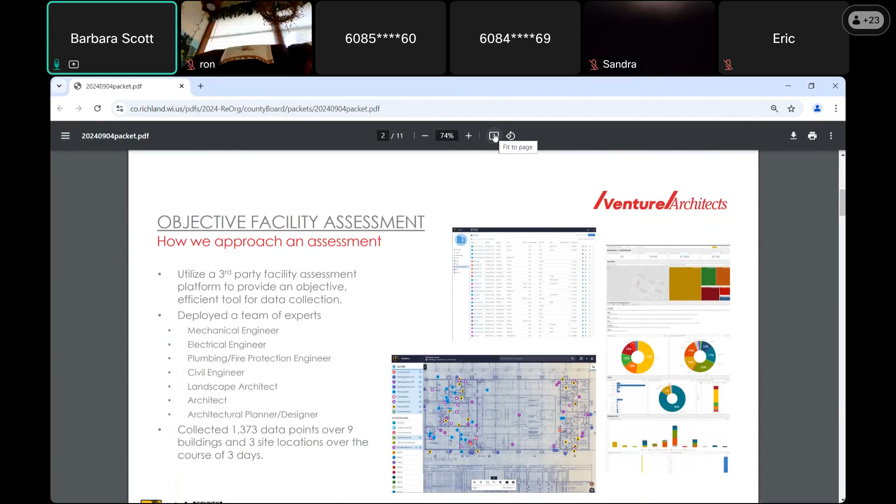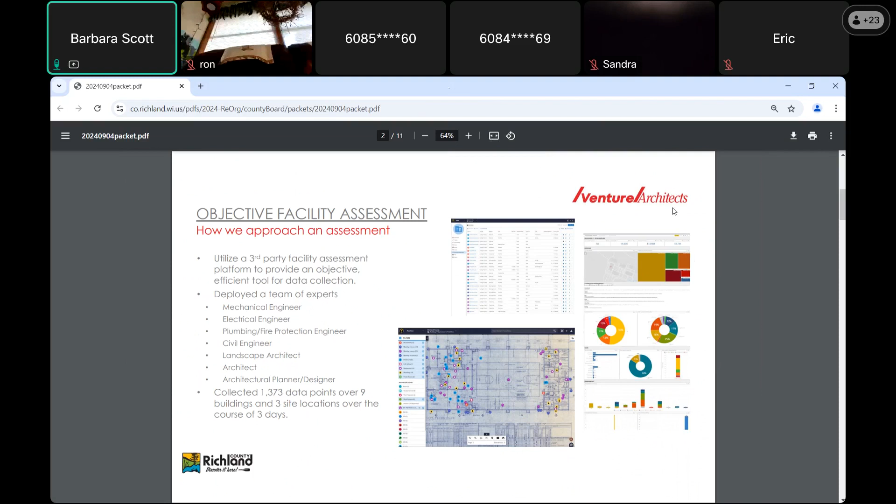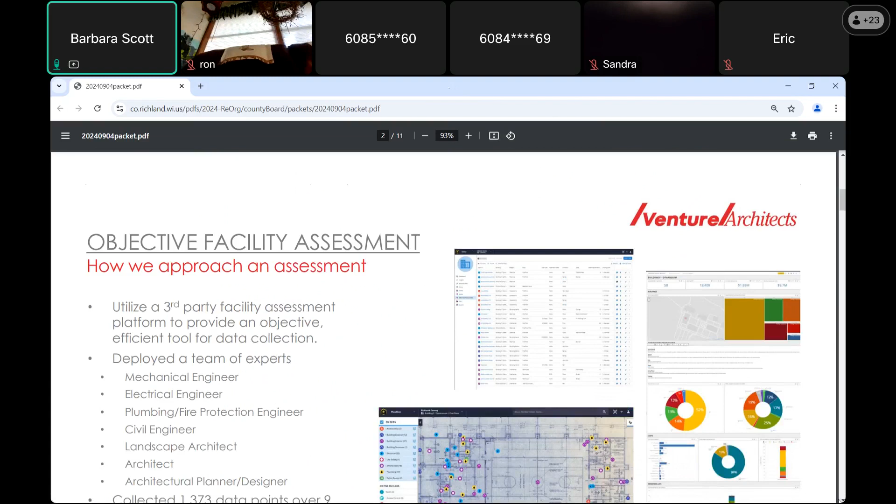One of the key things that is extremely beneficial for us is we used a third-party software platform as part of our process for collecting data. Facility assessments can be very subjective or objective reports. By using this third-party software platform, we were able to help validate for the county that what we are assessing here is as objective as possible.

As part of that process, we collected over 1,300 data points over 9 buildings and 3 different site locations. The 3 site locations would be the UW Richland County campus, the courthouse and the block where the courthouse and jail are, and across the street where health and human services is located. We looked at all 9 buildings that are part of that. We did not look at the Simon Center, that was not included as part of this. All of that was taken care of over the course of 3 days in April.

So that is the background. As you can see, we have imagery here of the platform we were using and how everything is collected. We have the floor plans on, and we're all using tablets as we go through. We can take photographs as we're going through, and we're logging the data. We can even get into the specifics of an air handling unit, and if there's a placard on that unit, we can take a picture and it'll actually read all of that data. So it's a very data-rich environment that we're working in.

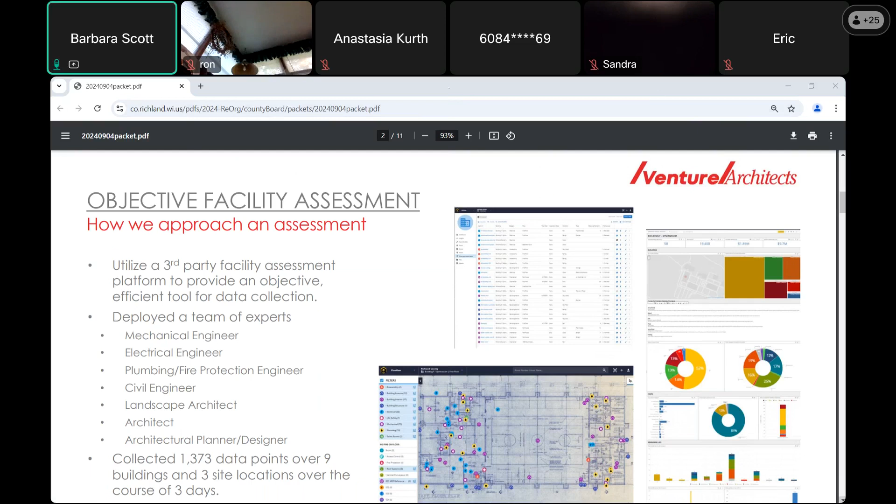Some of the outputs are that we can take that data and create dashboards with it. So we can go to the next slide, please.

The process we'll go through as we review the buildings will follow how they were identified on the original 1966 plans for the campus. We'll start at the UW campus, and it starts with building A. Doesn't really make sense, what is building A? Building A is the science building, which is the furthest building from the parking lot. It's the one that had the newest addition on it.

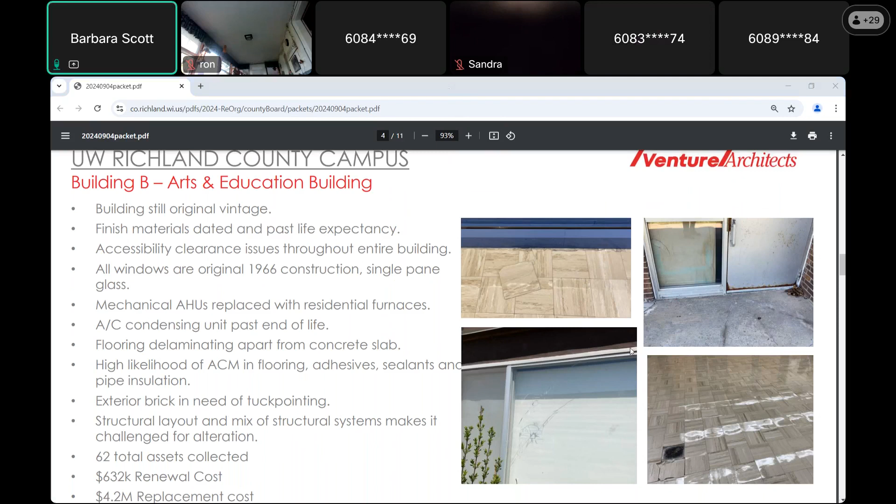And the next building, which we can go to now, is building C. This is the library.

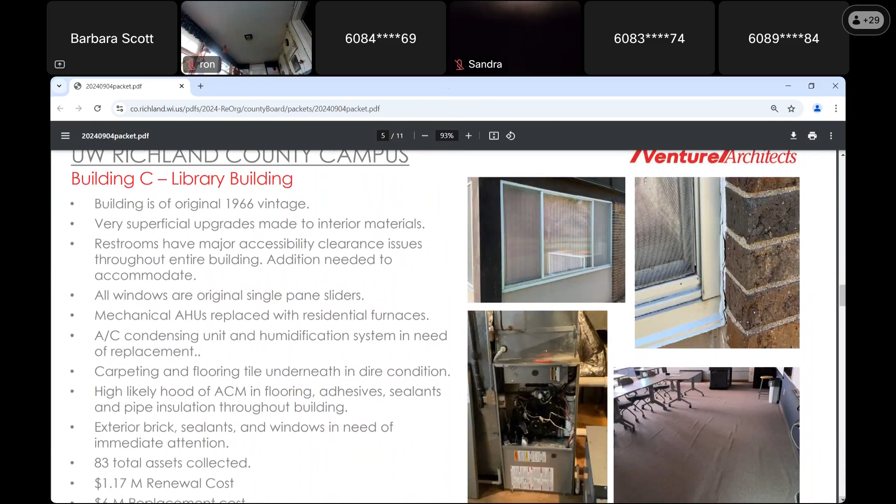This building, as well, no additions have been made to it; it's 1966 vintage. There have been some superficial upgrades made to the library, one of those being carpeting put in the main library space.

It appeared to our team that the reason for this was the same issue the arts and education building had, which is the flooring tile was starting to curl and peel from the floor. So the risk of having to pull that up and replace it and deal with potential asbestos issues means the easiest thing is to just cover it with carpet so nobody has to touch it.

The picture in the lower right shows how the flooring is now starting to telegraph through the carpeting, and it's pulling the carpeting apart.

A lot of issues on this building, particularly with the sealant and caulk around many of the windows and soft joints. Those are probably 10 years past the age they should have been addressed, so there's a lot of exposure to weather coming into the building. This isn't the only building with that issue, it was just really well exposed here.

The image here on the lower left is a furnace. This is also the case with building B.

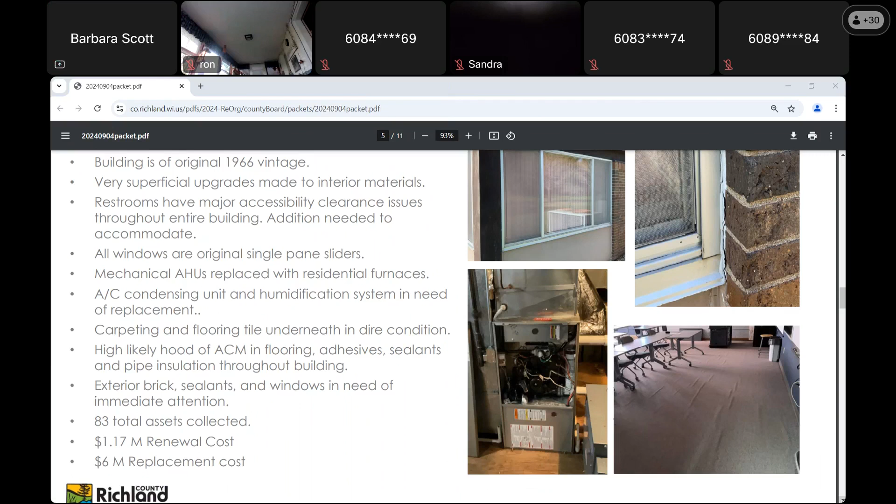I think we covered everything in this. We can go to the next slide with that.

The next building on here is considered building D. This is Melvill Hall, the administration building. This is the building that had the addition put on towards the gymnasium in 1998. The addition, I will say, from a functional standpoint, was really well done.

Part of the issue we looked at is when we look at the original part of Melville Hall, that was specifically designed to be instructor and professor offices. They're really rather small, not up to any standard for what you would have today. If we were designing a new office building, those would be undersized offices. You could knock a wall out in between, and still the proportions would be slightly odd. So any kind of reuse of the additional spaces, the part closest to the Roadrunner Cafe or the Copper Top, that piece of the office is also a double loaded corridor - you have a corridor down the middle, and on either side are these smaller offices.

So to really make any kind of offices work in the original part of Melville Hall, it would require almost gutting out that entire donut of walls and trying to reconfigure that to probably a single corridor with offices on one side. The other part that's kind of odd was the courtyard in the middle.

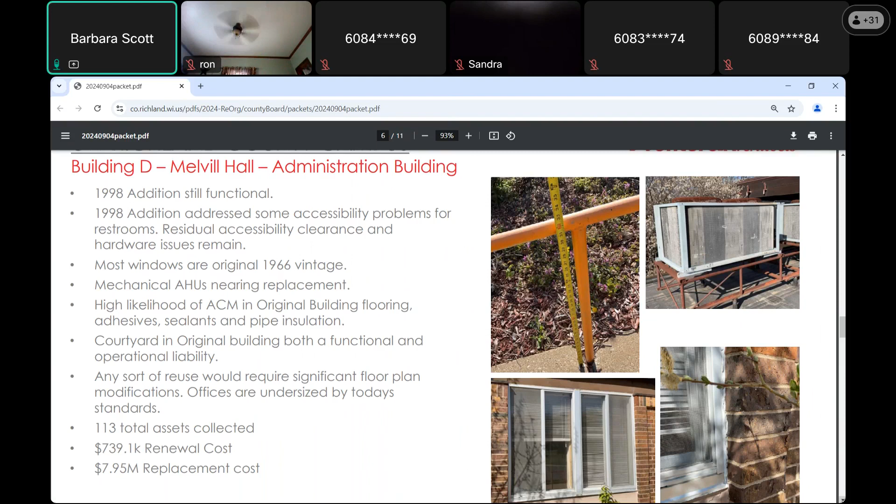We can go to the next building, which would be Building E. Building E is the cafeteria, the student center, and the theater building. This building, we collected 133 total assets. Again, very much the same pieces with this as with all of the other buildings: single pane glazing, accessibility issues.

This, they actually modified, they addressed the accessibility issue. I believe it was likely for the theater with the location of it. There's a vestibule on the south side of the building that is fairly large, and actually took part of that and created a family restroom that's accessible. And it's right next to the men's room that are in there.

And it was, again, one of these odd things. We have the original drawings, we're looking at it, and we're like, why are there 3 bathrooms here? We only see 2. And it's like, oh wow, somebody put one in a vestibule. That's a unique solution, and it works out well for the purpose that was needed, but it still does not address the accessibility issues elsewhere.

There are a number of stairways that are too tight, doors that don't have the clearance that are needed. So to make this functional from where it stands today, there would be a great deal of investment needed just to get everything up to be fully accessible.

There was a water leak above the music room at some point. A lot of the floor tile, much like the floor tile that we have in here tonight, is starting to curl. It's delaminating in a way, and that's coming up. So I believe the roofing piece is addressed as far as we could see, but that damage has been done.

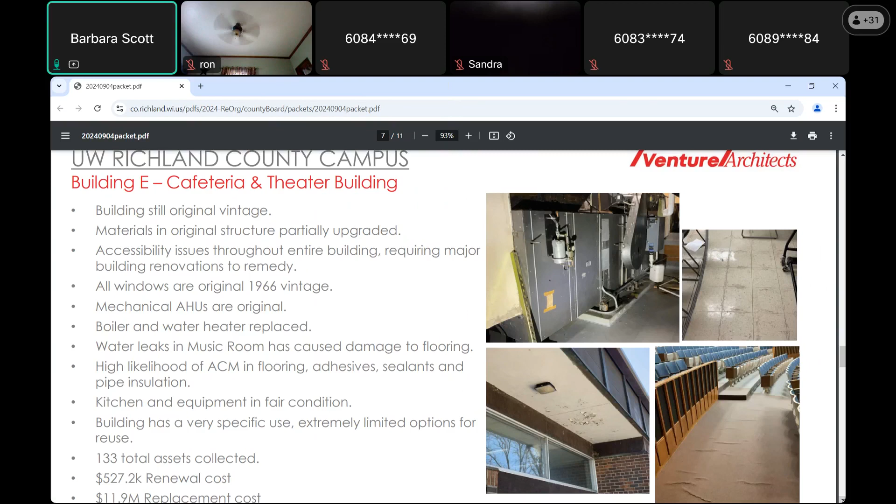So the last building out on the campus is the gymnasium building, and we have on here also the central utility plant. Now, that's not the central utility plant for the entire campus, but a good amount of mechanical equipment is housed on the south side of the gymnasium. A lot of that equipment is original vintage stuff from when the building was built in 1966. Still working, I think that's what I can say with that.

The gymnasium building has a lot of the same issues as the other buildings, which is kind of a common theme throughout here, just because it's the same date and being maintained the same way. I would say the piece that's different is this massive athletic floor, and the floor is in extremely good condition. That's a very difficult thing to keep maintained that way.

We actually took a break while doing the assessment and shot some hoops, just because we wanted to test the bounce on the floor, and that was good. Literally going through, I think the athletic director's office, there are jerseys just still there. It was rather interesting because we were like, yeah, we could just put those on and shoot hoops as well, but we didn't do that. That would have been a little odd.

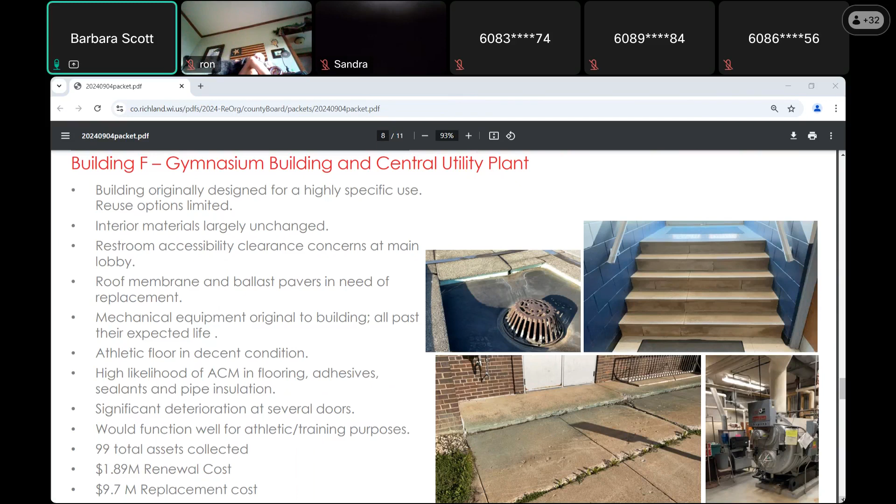When you start looking at a renewal cost of that, yes, that's a lot of money. But when you think of the actual building cost being $9.7 million, that's an effective number to bring that gym up to a level if it were needed for any other purpose, some kind of gymnasium, physical training, whatever that would be.

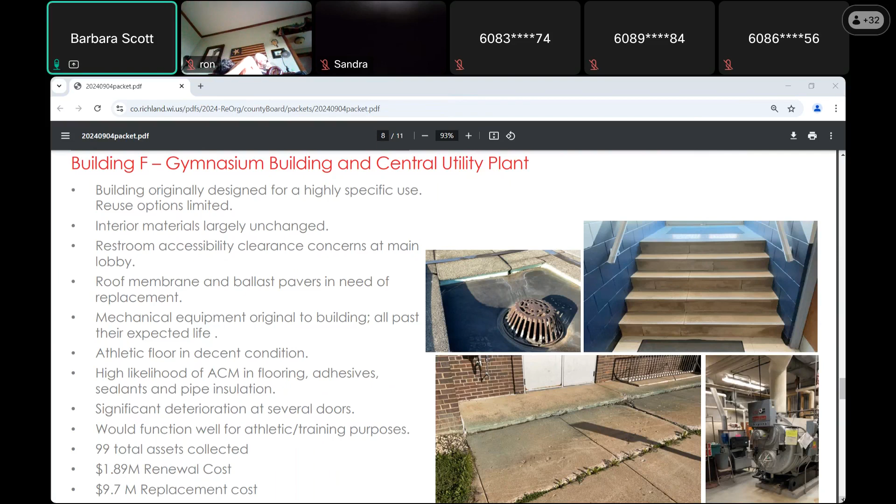So the next building, we have 3 left here. Now we're downtown, we're at the Health and Human Services building on Seminary. This, as I'm sure many of you are aware, originally was a supermarket. Then there was an addition, and it is the Human Services building now.

Really, for the most part, accessibility is not an issue here. As those additions happened, that really seemed to get picked up all the way along the way.

One of the really great parts of this building, as we reflected after we did our analysis, is for the services that it's providing to the community and to the county - it's really in a great location. It's centrally located.

It's really accessible from the standpoint of the parking is at the same grade as the door level, and anybody needing to get in there, even if you have any kind of device that you need to get in - if it's a cane, if it's crutches, whatever it is - it's a straight shot in there. That's actually hard to get in a lot of places, so take that as being much more of a benefit for that building than it seems.

That was really great to see. We went on the roof - yes, the roof, which then leads to the condensing units, which leads to the oddity of this building.

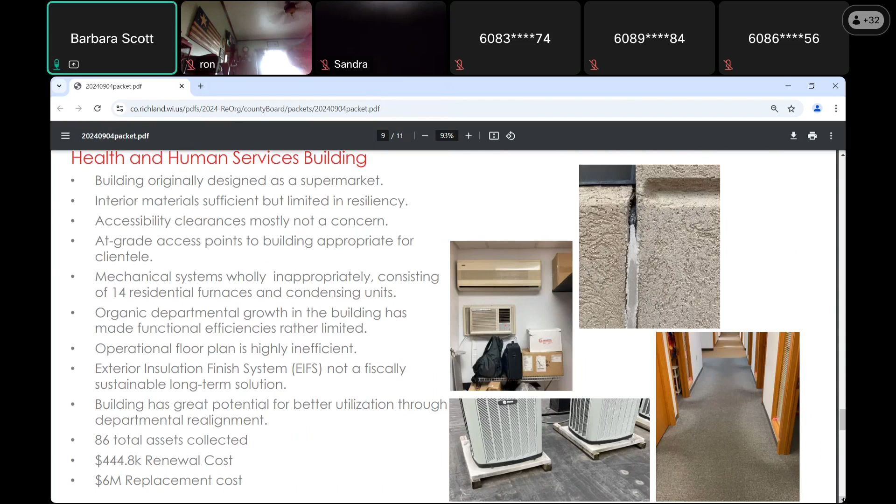Renewal cost right now we have at $444.8 thousand, and to build a like-size office of that square footage would be $6 million. We can go to the next building.

The courthouse. It's not historic - well, it is historic because it's old, but it's not on the historic register. We found that out and understand that to be not a limiting factor for the building. So that's an important piece.

If it were on the historic register, there would be a lot of additional requirements that go along with any kind of modifications you'd make to that building. With it not having that designation, there's some latitude that can be given for any modifications made to the courthouse building.

So the finishes in there - you can't do it again like that today. Marble everywhere, and it's beautiful. The door hardware is incredible. The wood doors are incredible. Every part of that is incredible.

From a functional standpoint, it's got some issues. It's a big, old building with a massive foundation. In the basement, or ground floor, there are departments in there that make it almost like being in a maze - one department takes up six different rooms in one corner of the building. So it's very inefficient for office use.

As you go up the floors, there are a lot of load-bearing walls separating the building. The DA's office is separated between three different spaces. The clerk of courts - I think part of her office is actually in a vault. There's just a lot of quirkiness with a building of that age from a functional standpoint.

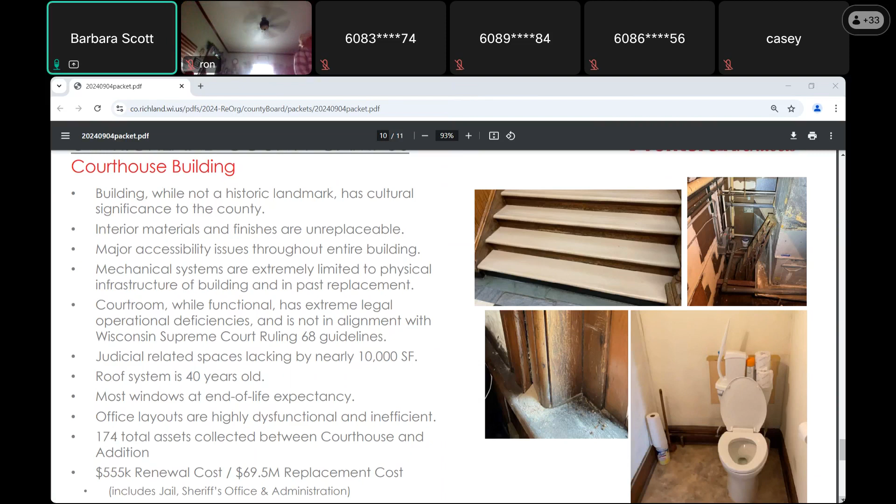The other item with the judicial space we were discussing is it's lacking, roughly, with the SCR 68 requirements. It's short roughly 10,000 square feet of required space. That's part of SCR 68.

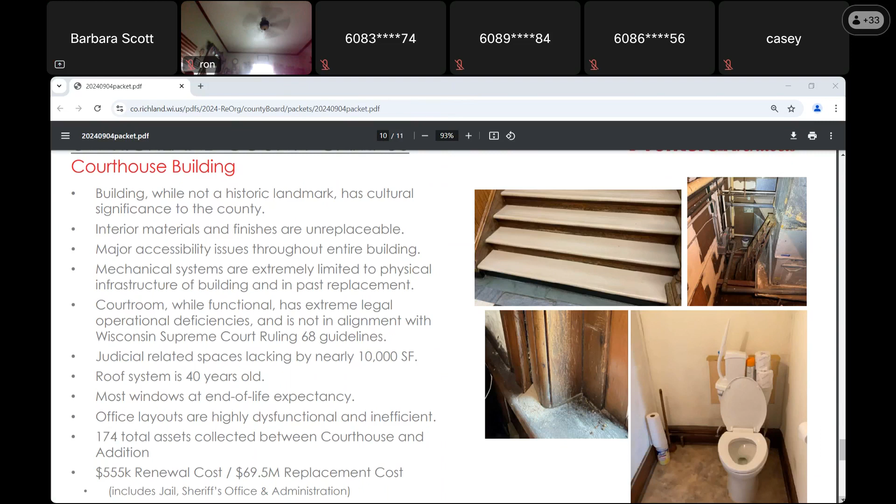So the renewal cost and the replacement cost, when you look at that, it's actually tied to the slide after this for the jail. The way we assessed it is because both of those buildings are combined, we reviewed them as one combined building, so that cost is showing for both. So we can go to the next slide with that, please.

So the last piece of this is the most recent addition, the 1982 addition for the jail, onto the sheriff's office. It added administrative spaces on the second or third floor. I get that wrong every time, Candace. Is it the second floor? Third. Okay, the drawings have it differently, so that's why we have this odd misunderstanding on my part.

Okay, 82. First thing, couple of issues: we have the sheriff's office still operating and functioning in the original sheriff's office. In talking with the sheriff, it's working okay.

Is it as efficient as a highly efficient office building? No, it isn't. But they're making it work, and they've got the space that they need.

If we move over to the other side, on the lower level where the emergency vehicles would go, that's now patrol car storage, with the EMS vehicles moving to another location. On the back side, the east side, there are 3 different uses for that space. One door is the sally port, where any suspect would come in going through booking. They go in one door. The other door is a maintenance door, and the other is just sheriff's storage.

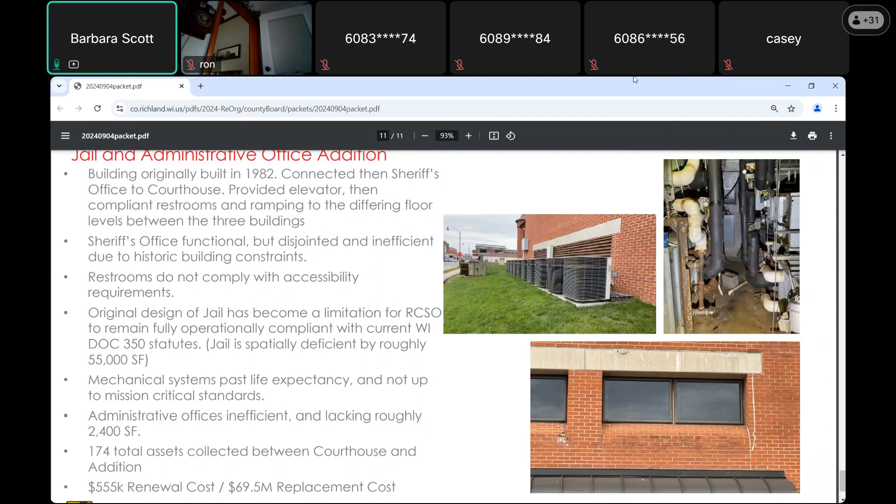So I think we have one person here who's either looking to ask a question or heading out. Thank you for coming, sir. There was one thing I wanted to ask you about—Dave.

In relation to the campus property and the mechanical stuff in the gym building that distributes—there's a lot of power distribution stuff in there. What was your assessment of that type of equipment?

Yes, so there too, a lot of that was original, and I'm trying to think of how we rated those—I think because those were original, and I could pull it up right now. They're old, we'll say that, and electrical equipment doesn't have an infinite lifespan. So it would likely need replacement for any reuse of that space. And I'm speaking as an architect, not as an electrical engineer.

I would expect any major reuse of that space would likely require the upgrade of a lot of that electrical gear and the switches that are in there. A lot of what I've found with buildings of this age is the parts that you need to replace, the breakers, sometimes it's still a fuse in some cases. Those are like the only place you can find those are on eBay. And a lot of maintenance people, there's a little group on eBay that just swap electrical parts because that's the only way they can find those. So that would be my assumption on the likelihood with that. I can come back with a more official answer after I confer with our electrical engineer on that. But because it is over 50 years old, electrical gear is not meant to function that long in that fashion.